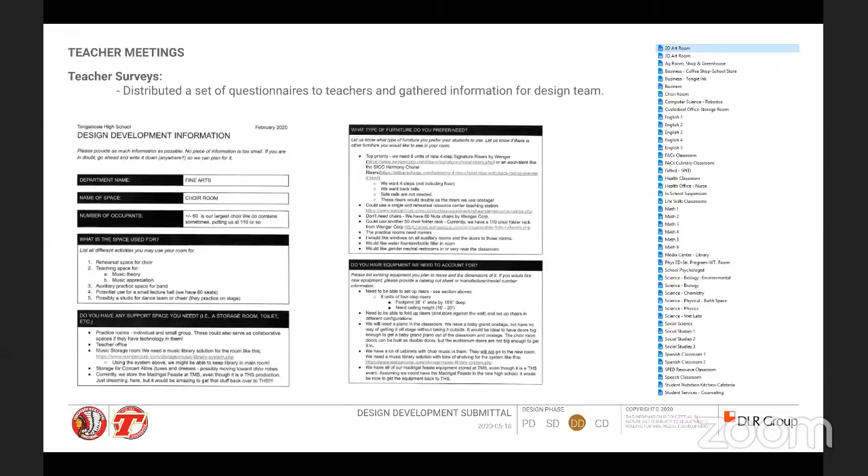Our next step was to actually meet with the teachers in person. So the design team took 2 days in the late part of February, early part of March. We met with staff and teachers at the high school.

And then from there, we discussed the general layout of their rooms, as well as we got into some specific needs for their classrooms. So we took all of that really great information that we got from the questionnaires and the in-person meetings, and we started to put those on our plans.

So we did have to do a second round of meetings with a select group of teachers for some of those spaces that really required a lot of attention, a lot of plumbing and casework modifications like art or science or FACS. And this is when sort of the COVID-19 issues hit, and with all the restrictions.

So we did those meetings via Zoom. Mark Farrar was very instrumental in helping us set all those meetings up with those teachers, so we appreciate that. Really a lot of time and effort was spent on documenting all of this information for the teaching and learning spaces.

So with that, we're going to start with the site plans. Thanks, Robin. This is Josh Earhart, DLR Group. If you recall, a couple of months ago when we were going through the schematic design process...

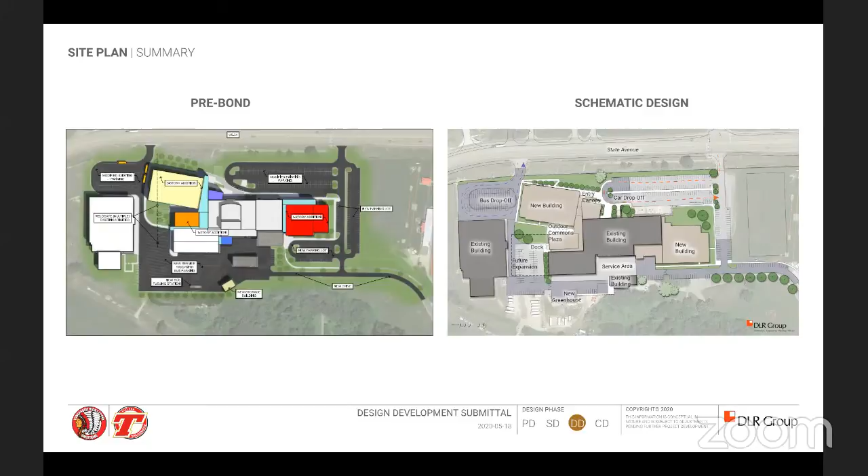So if you recall back in the schematic phase, we were able to separate the two and identify where the car drop off versus the bus drop off was, where staff could park and where students could park. And then we were also tasked while doing all this to hit the existing student parking count and staff count. We were able to do so in schematic design.

And if you go on to the design development, we were tasked to add another layer onto that. So what we did was we added an additional 50 plus stalls to the student parking lot to make sure there's an ample amount of parking over there.

And we developed this, you could say a campus drive, if you will, pulled off to the parking on the east side of the site. The goal of this was to draw the traffic off of State Avenue or Highway 24 and Main Street a little bit quicker.

So we can kind of avoid that backup on State Avenue in particular that a lot of the board was concerned with. KDOT isn't very flexible with moving these curb cuts, so this was our way of trying to improve that site circulation.

So we were able to achieve that, increasing the student parking count to about 1 stall for every 1.7 students. That's good, a lot of times we go for 1 stall for every 2 students, so we're doing better than that mark.

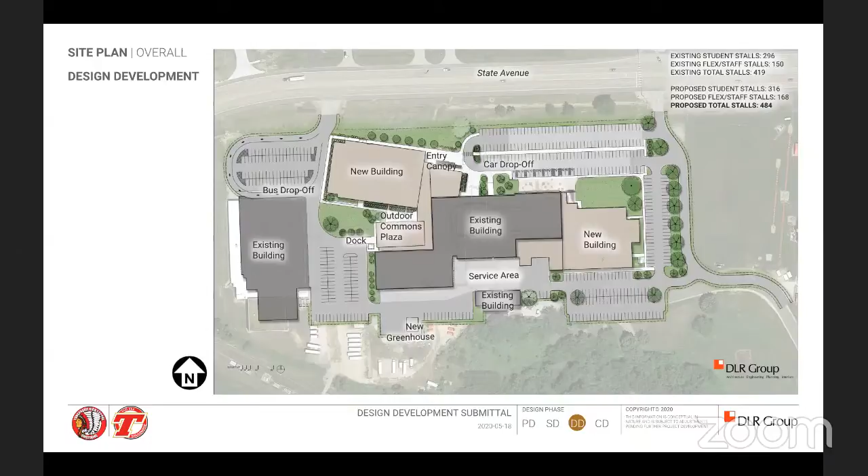If we go to the next slide, we can speak more specifically about some other enhancements. The entry plaza to the north, you'll see a rendering there, but we started identifying some of these seat wall elements, flagpoles, and paved decorative concrete areas, as well as the outdoor commons plaza area. You also see a rendering of that as well.

One of the additions we made since SD is a 3-foot tall loading dock, centered in the rendering right there, next to the dumpster. That means the road or drive there will drop 3 feet in elevation, so when you have a box truck or delivery vehicle, they can unload new goods and supplies at a level and safe area. Everything else is pretty much the same since the last SD.

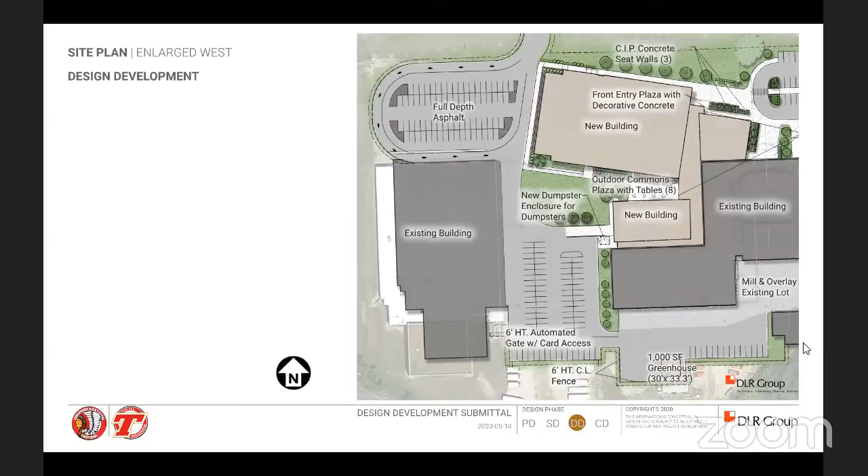If we go to the east side, this is where you'll see the addition of that campus road on the outer side. This allows students to enter the site more freely without having to bottleneck at the entrances there, so it really helps clean up the area.

And again, we started to identify bike parking and the automatic gates to the secured service yard area, and how we are also maintaining the existing memorial space just north of the school.

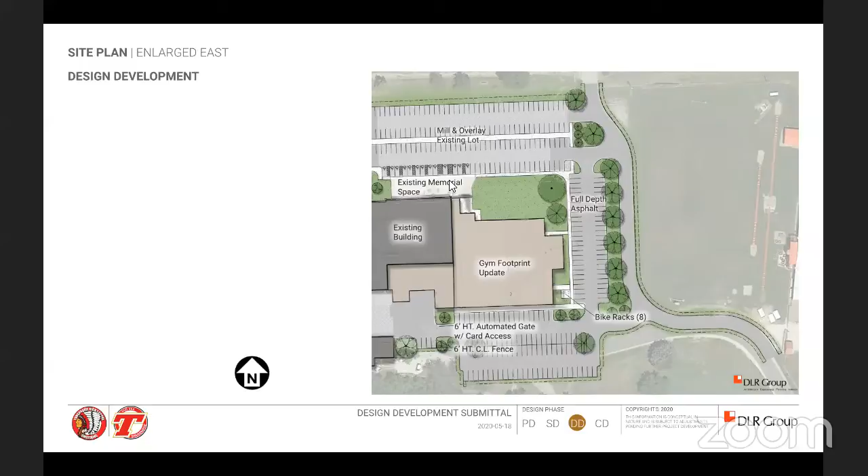With that, we can go on to the next slide and talk a little numbers here. The existing stall count is about 419 stalls. We're up to 484 stalls, and the future capacity of the high school is about 800.

We also took on the task of identifying where we could locate approximately 200 more stalls. We could fit this nicely either on the west side of campus or the east side of campus, depending on how everything plays out in the future. That would bring our parking count to 1 stall for every 1.5 students, which even improves it more.

So we really think we're coming up with a great solution here that's really improving the parking situation as we move into the future. That's all I have for the site. Thank you.

Okay, this is Robin again, and we'll move on and talk about the existing building real quick. So we are going to be demolishing the existing building shown here in red. As you know, here in a couple weeks, the church and the district office will be demolished.

The colored portions of the areas around the TPAC show where we will be doing upgrades to flooring and paint. We will also do some minor modifications to the west stair to meet up with our new addition.

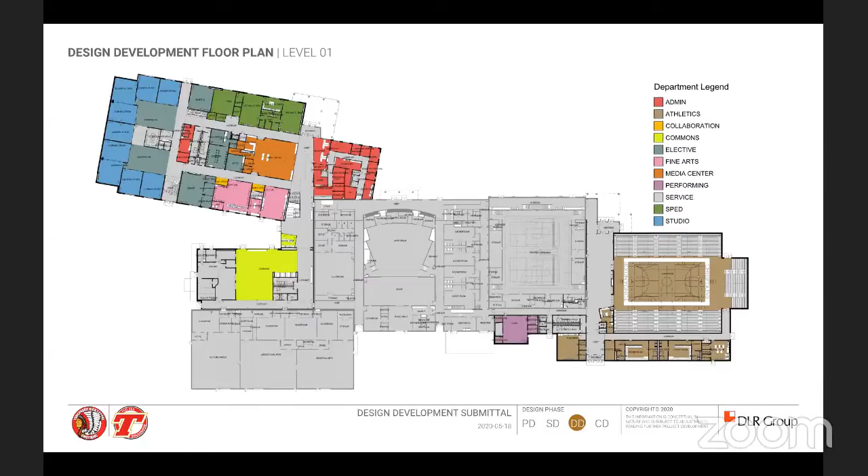I also wanted to point out that we've had some security meetings with Lauren and Mark to talk about how to zone the building in an emergency. We also discussed locations of card readers for access control and security camera placement for the overall building complex when it's complete. I also wanted to mention the HVAC systems will be rooftop package units.

Classrooms will be provided with individual temperature controls, and Trane equipment is the basis of design, but other vendors will be allowed to bid the equipment.

This slide is showing the enlarged plan of the East Gym Addition, which shows the new lobby, the 2,300 seat gym, and the adjoining locker room spaces. This addition also has the new choir room space shown in purple.

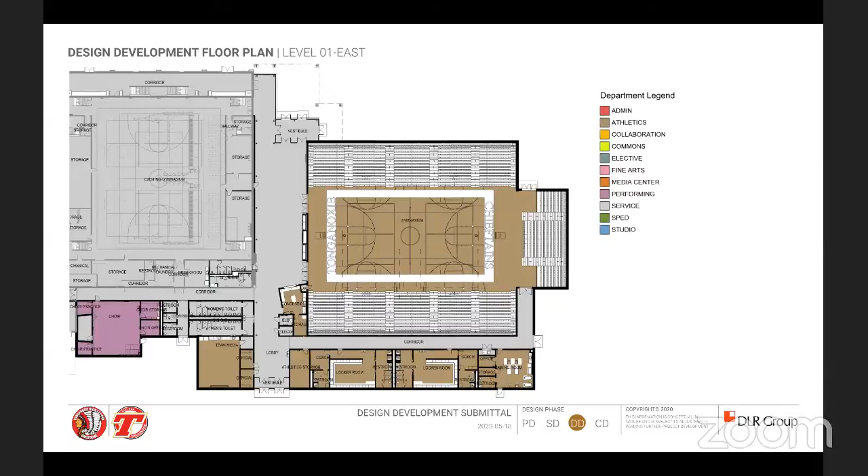And then the axonometric view shows you how the gym bleachers will look. Later in the presentation, we can show you our ideas for the lobby space.

So the next slide shows the West Addition, which is the new main entrance and administration in red. There's a long lobby that connects the two-story academic wing to the new cafeteria and food service area. The cafeteria is designed to seat 200 kids in 4 lunch periods.

In the academic wing, this first level shows a centralized media center in orange, with electives along either side including special education and art. The core classrooms are located at the west end, shown in blue, and they are all connected to an open learning lab space.

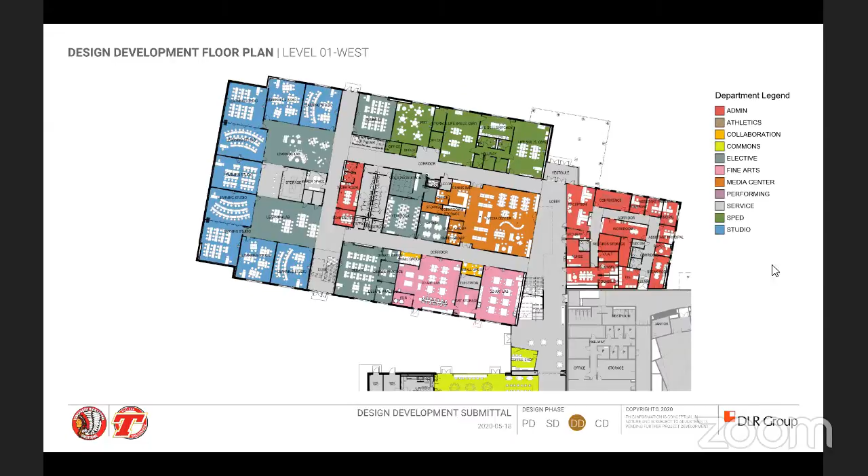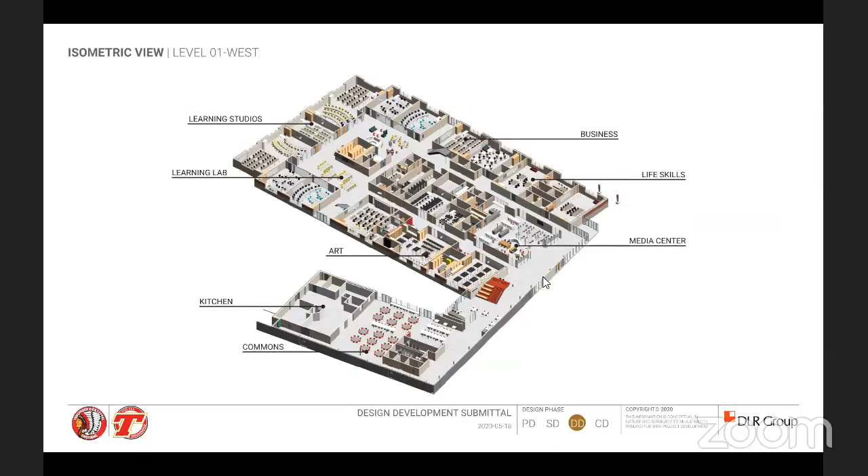So the second floor academic wing matches the first with the core classrooms at the west end, so those stack directly on top of each other. Again we have science electives around the outside and more specialized classrooms in the middle. The media center is a 2-story space.

So when you're on the second level, you can look down into the media center space as well as over into the entry. We are showing a lot of glazing and a lot of transparency, which you can see in the axonometric view. But we intend to use some frosted glass in key locations along the railings and the stairs just to minimize some of those views.

So we're going to move on to West Campus. We've had a lot more development on West Campus during design development. So this space is going to be designated as the new space for the district administration.

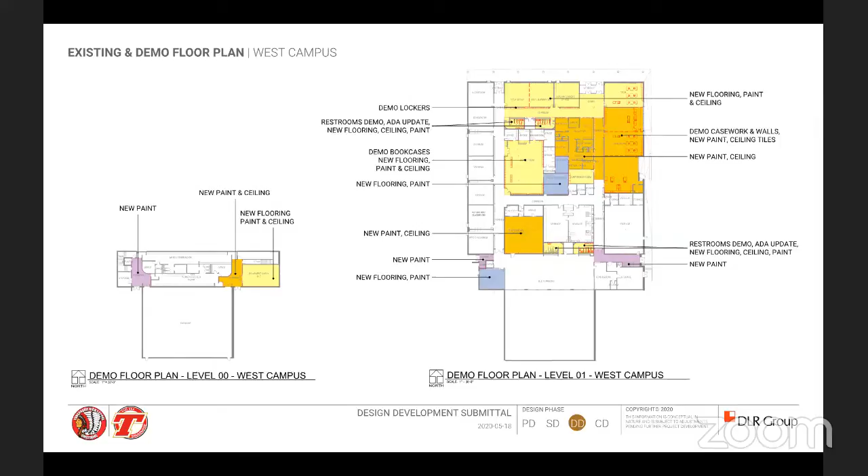There will be some slight demolition work to upgrade the existing toilet rooms to meet ADA. But most of the renovation work is cosmetic, with new flooring, paint, and ceilings, as you can see in some of these highlighted areas.

The next slide shows how the space is designated between the district, which is in blue, and then the city rec department in the olive green color.

So Lauren, Tanya, and Forrest will office out of West Campus, and this is also where your new boardroom will be. There's a large space for staff development meetings and a space for wrestling practice over on the right side. So there will be plenty of space for the district to use for storage, as well as for growth for future learning opportunities.

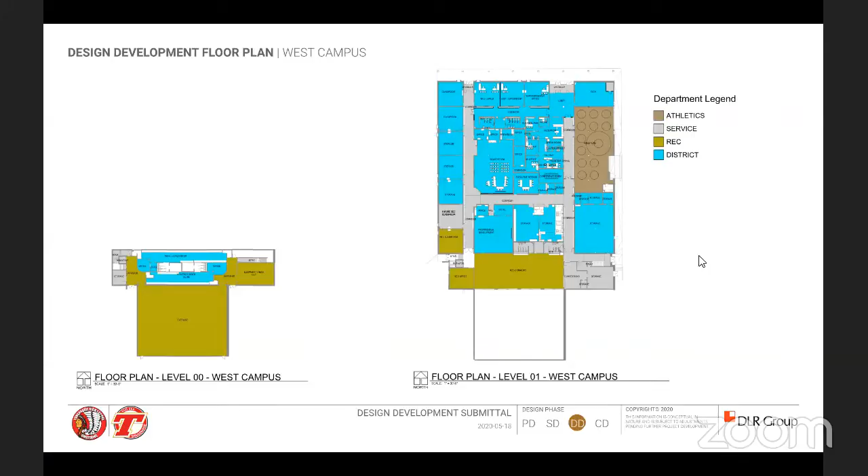And so with that, we're going to move on to the really fun stuff and talk about the exterior and interior rendering.

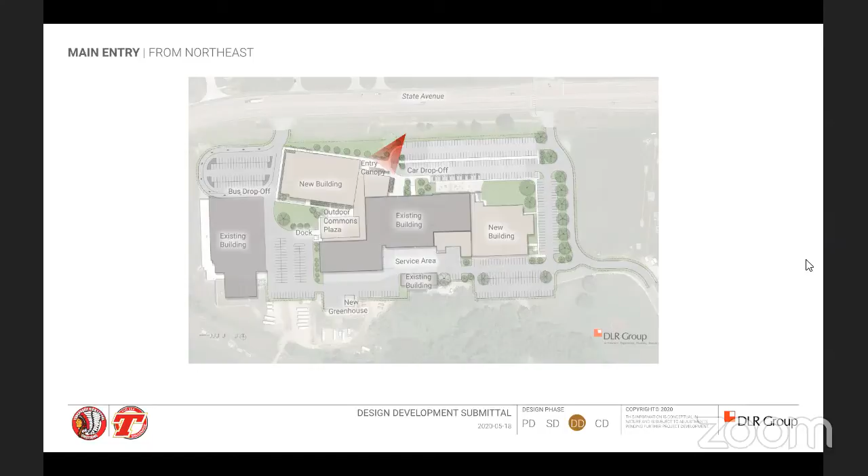Okay, thanks Robin. This is Craig Serig with DLR Group. We've continued to develop the renderings that we reviewed throughout schematic design and even at the Tongie Strong meeting.

You'll see the red cone on the site plan, which indicates the view we're looking at. So this is looking toward the main entrance, where you can see the site elements that Josh was talking about earlier and how those have been developed within the 3D rendering as well.

The same materials haven't changed since our last meeting. We're using the blonde or buff colored brick that matches your existing concrete block, and the red brick will be an exact match to the brick you have now on this end of the building. We've also got some metal panel and interlocking metal panel soffits for the canopy.

And then painted steel columns out front that have a little ornamentation to them and will be up on a plinth to protect them from weather and maintenance. And then storefront and high performance glazing for the balance of the clerestories, the entrances, and the windows into the admin area.

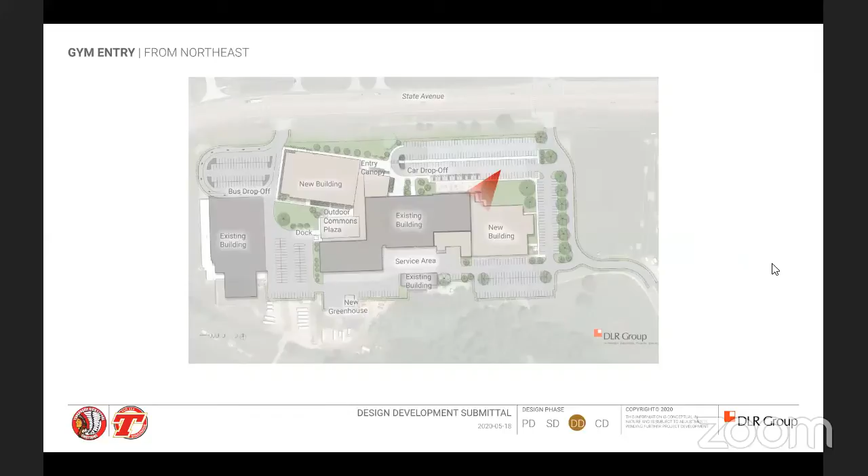And then this cone again shows we're going to be looking at the athletic commons entrance now. So an evening shot here, to give you an idea what it would look like arriving for a game, with the internally lit commons area as the beacon calling you into that space, giving clear identification of the entrance. Again, using the same canopy materials, storefront glazing, and treatment of the columns.

The columns become this organizing element that tie all three entrances together, from the admin down to performing arts, and then the athletic commons entrance as well. The gymnasium over on the left-hand side is your red brick, with a little bit darker metal panel for the upper portion of that facade, wrapping around the entire gymnasium.

Okay, and then the last view would be of the outdoor commons plaza area.

So this is looking from the west, in between the cafeteria commons on the right-hand side and the education wing on the left-hand side. The larger glazed opening is the two-story stair that connects the first level and second level.

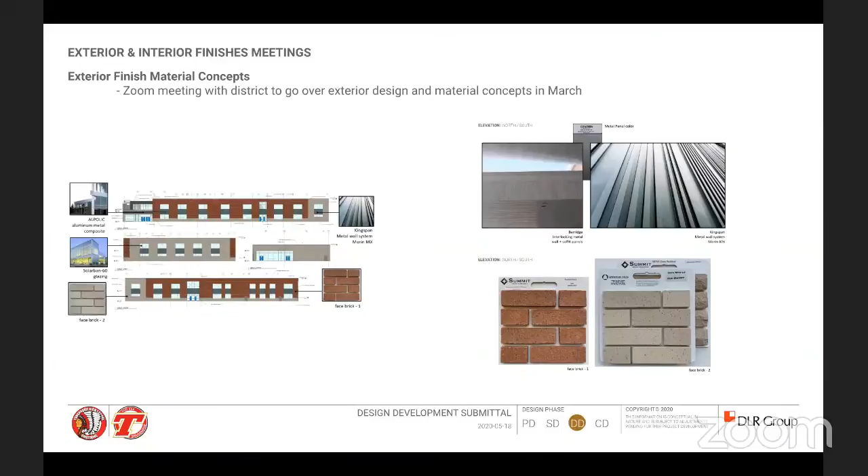Just to call out, we've got entrance doors from both the art rooms that go out into the enclosed courtyard, doors from the main commons right beside the Tongi store, and then doors that will come out from the cafeteria itself.

Okay, and again, these are the materials that are called out on the elevations, and we've talked about those. So I think we're ready for our interiors renderings.

Tammy, you're on. Tammy there? You're on mute. Okay, this is Tammy with the DLR Group. Sorry, I was muted in two different places.

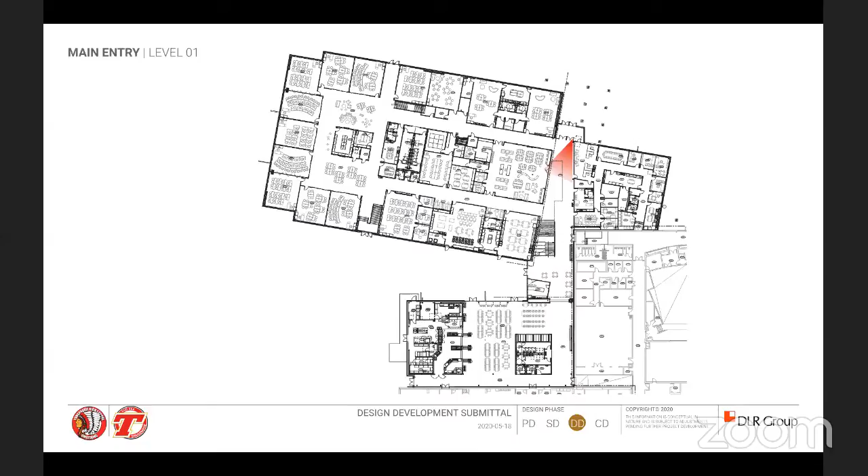We're going to jump right in and start looking at the main entry lobby. To the left, we have the admin, and to the right is the media center. Straight in the back is the seating steps, and straight forward you're going into the student commons. The entry lobby is more neutral finishes with splashes of red.

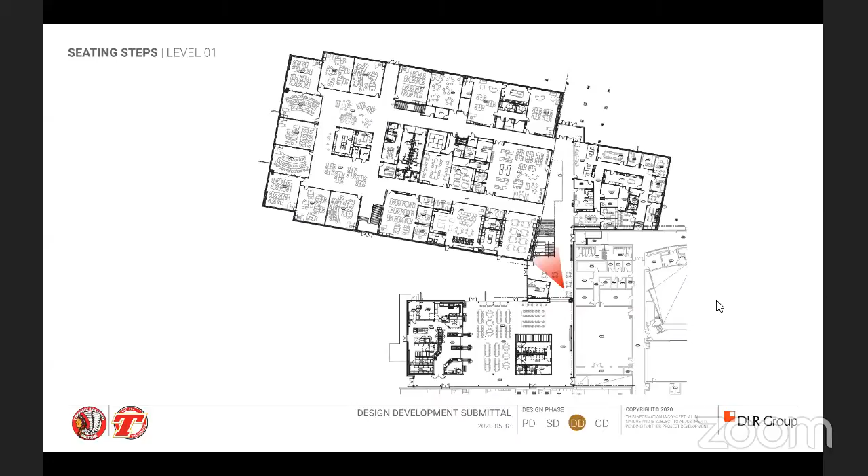Next, the next view we'll be looking at is the seating stairs.

Here we have red rubber tile and rubber tile treads with wood seat caps. The glass rail, as Robin mentioned earlier, is a lightly frosted glass. And as you can see with the room above that overlooks this, that frosted glass at the bottom panel is of the student research studio above. We've added Tonganoxie spirit elements throughout, with the T logo on the stairs.

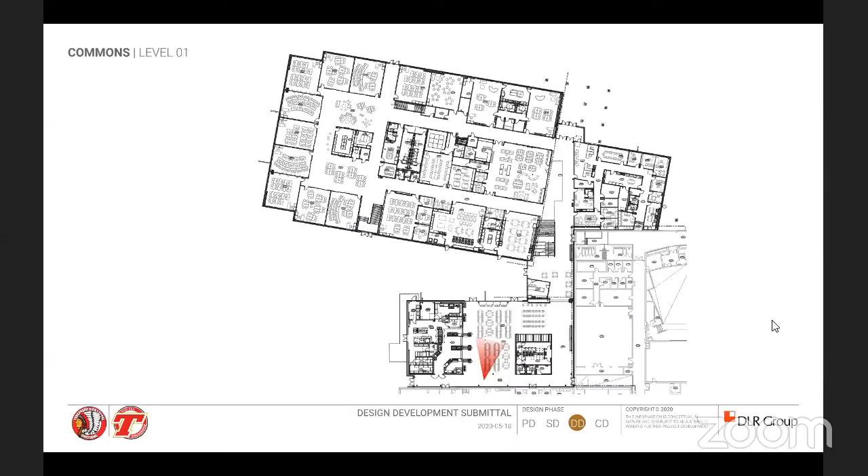Next, we're looking at a view of the commons. This shows the servery on the right. The courtyard is straight ahead. And on the right, we have a graphic word wall covering that we will personalize to Tonganoxie's keywords, phrases, and school spirit. This just gives you an idea of words that could be used.

Next, we have one of the learning labs. This view faces the center core of the learning lab. In this view, we show multiple areas to collaborate. To the left, we look into the makerspace lab, and to the right, there is a dry erase wall covering that wraps around the core. We also use acoustical colored baffles to define this area on each of the floors.

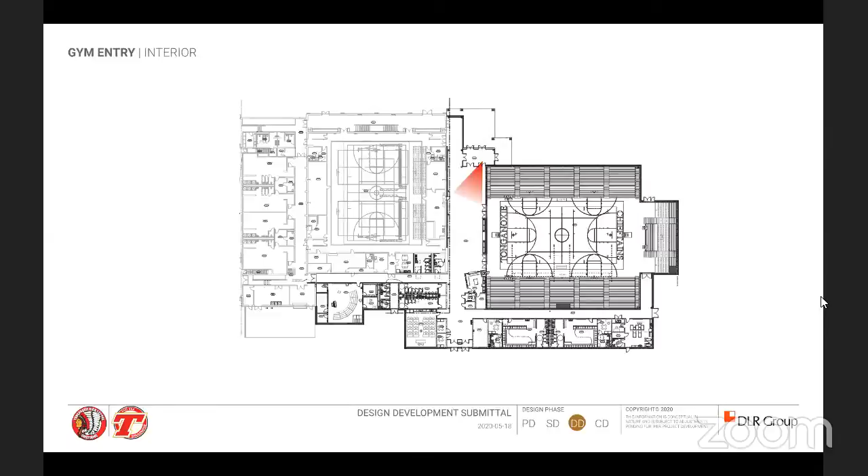Now we're going to look into the athletic lobby. Here to the left, we have the entrance to the gym and some display cases. Straight ahead is the concessions, wrapped in red panels. And to the right, we have a tone-on-tone painted wall graphic that says Tonganoxie Chieftains. We show tall tables and chairs, or seating for concessions or events.

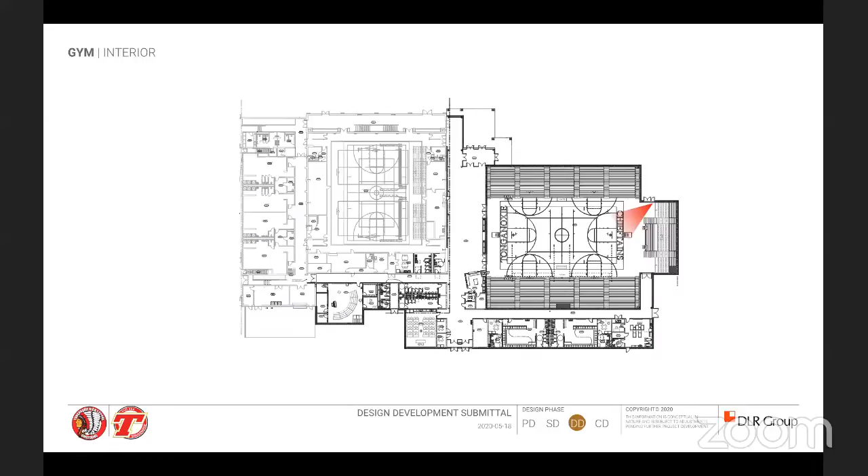Next, we'll show a view inside the gym. Here we have white walls with bands of red Tectum acoustical wall panels and painted red stripes. We've shown the Tonganoxie spirit painted on the walls with the Chieftains and the T logo. The ceiling will be a medium gray.

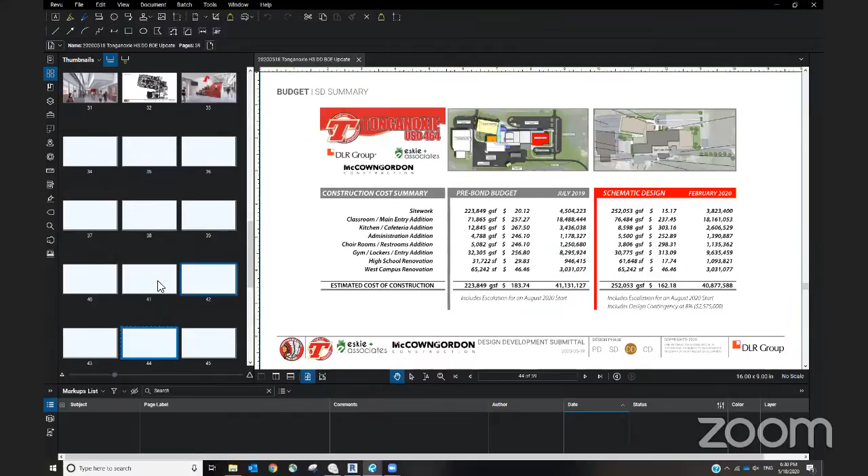And then this finish page, these represent some of the finishes used throughout. We have the main entry lobby shown, and on the left side, we show some media center finishes and the coffee shop and student store proposed finishes. So just some examples.

All right, so we're going to go into the budget. We can't hear you, unmute your screen. Can you hear me now? Yep. All right, sorry about that, just had the same problems Tammy did.

Yeah, I'm going to take a minute to talk about budget. I really wish I could have seen everybody's faces react to those images, though. Those are coming along really well.

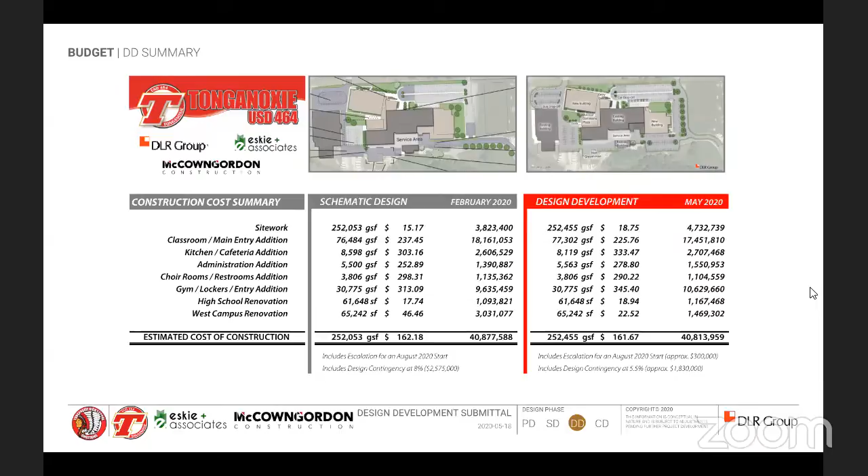There has been some movement in some of the numbers realigning with our scope, so we'll go through some of that here in just a minute. But as Aaron mentioned at the beginning of the meeting, we are overall on budget, so that's good.

What I've done here is on the left, there's the schematic design layout for the site, and on the right is where we are today. Right below it, there are some cost variances, whether cost increases or decreases, and how they impacted the budget overall. I don't plan to go through those line by line today. You should have a copy of that. If you have specific questions, we can address those as we get through the presentation and backtrack to this.

The biggest change is we're just getting caught up now with the additional parking to the southeast, and the drive realignment along the east of the building. That's really where most of our cost is coming into play. We had some other things that get adjusted along the way up and down, but those are the major cost drivers. In the end, we're up about $870,000 on the site.

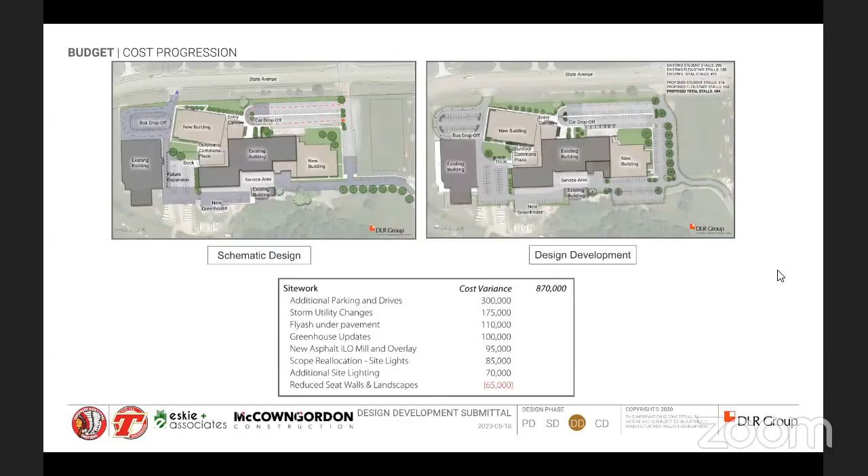We'll go through how we made that up in some of the other areas. So on the next slide, this is the academic addition, which includes administration and the cafeteria. Again, schematic design is on the left, design development on the right. Obviously a lot more has gone into the development of the design, and we have a lot more information.

But the biggest thing that's really contributed to our savings, as you can see, we're about $432,000 down on the administration wing, which is good. That came with coordination with HVAC controls. We had some meetings with your group to make sure we aligned that with the needs of the facility. With electric, this honestly is coordination between your IT staff on what Forrest is going to be doing versus what our construction team will be doing. So those are the two biggest savings there, in HVAC and electric.

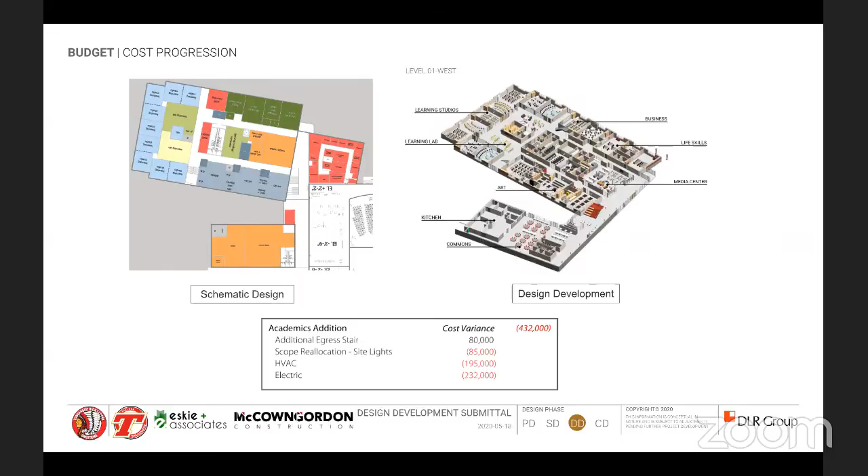So on the next slide, this is the Fitness and Wellness Center addition. Of course it does include the choir, but probably the biggest contributors to our scope changes have to do with the skin, as the first one on here. I included an image down there on the lower right. At the SD level, we made some decisions to look at options on the skin to reduce the amount of metal panel on the back side, the south side of the building.

At the DD level, we wanted to run through that and make sure if the budget could handle it that we could include it, but we're studying options right now. If there are opportunities on the south side, again with limited view from drive lanes, we can look at some alternative materials to save some money there.

HVAC, there's some coordination there. As I mentioned, on the academic side it came down. On this side it actually came up once the design team was able to get through sizing the equipment for the space.

There's some other changes in the choir addition. There's a corridor that now runs through and connects the existing campus together, whereas before it was closed off, creating an awkward loop. So that was opened up. Some additional square footage was impacted in the choir rooms itself, and then there are some additional restrooms there in this end of the renovation.

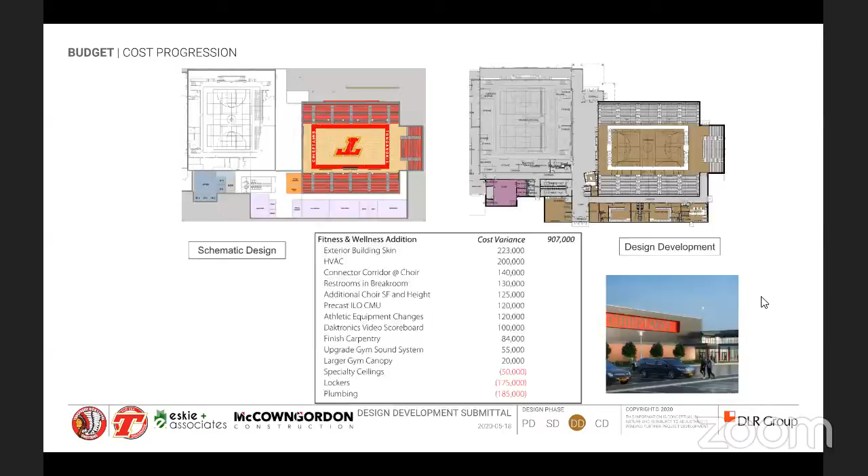The high school renovations themselves, we've seen probably the most design input in this round as far as the high school renovations, so we're getting caught up with that. Really, we're on budget with everything. There's a couple scope adds that we want to talk about.

One of them is the polished concrete that you're aware of that got added into the early site package. So that corridor just north of the existing gym, we're going to perform that work this summer. So we did have some money set aside there, but it was not a full floor replacement and polish. So that's only worth $14,000. It's not a big driver in cost.

Then the next one is the Performing Arts Center canopy. So right outside the auditorium, there's a canopy there. The design team is working to make sure that has a cohesive design, when you're talking about the athletic center entry canopy and the new academic entry canopy. So the design team can address that as well, but we do think it really is good to have a cohesive canopy where it otherwise would kind of stand out there. So there's some increased cost there that we picked up.

Overall, we're not up much on the high school renovation. Probably the biggest swing in cost is actually in the West Campus. I think most of us knew this was coming, as we were not planning to spend as much in the Parks and Rec area.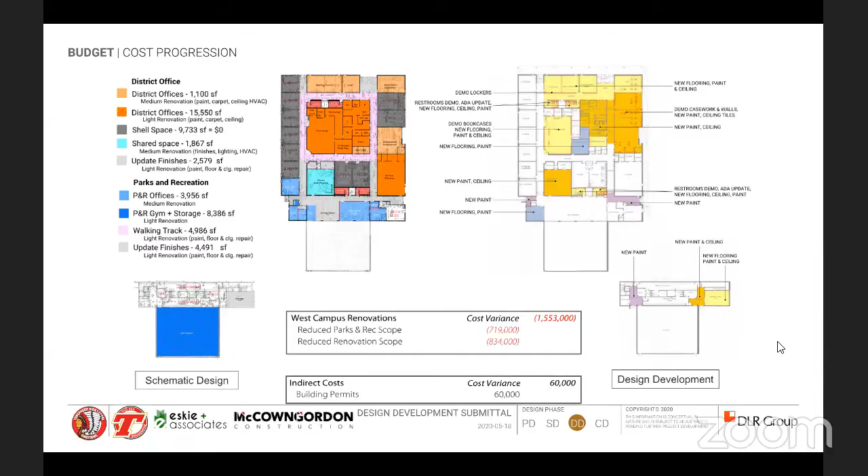So high level, that's where we are right now, and it does balance itself out. To the most part, any savings is getting shifted into the design contingency to make sure we're maximizing your bond dollars. And Aaron will go through the master budget and if there's any other items we want to earmark for some of that savings.

All right, thanks, Joel. So yeah, as Joel said, as we talked about during the schematic design, the overall master budget of the $51.4 million bond project, at schematic design there was about $10,522,000 that was in the estimated soft costs. That's increased a little bit just due to the slight decrease from the construction cost side of the ledger to get us to that even 51.4.

So you'll see in the breakdown, most things are staying pretty much the same. We've got the architectural fees that are based off of the construction value from the DD budget, and miscellaneous soft costs that have to do with some already expended funds for geotechnical inspections and surveys.

So the FF&E and miscellaneous furnishings, those adjusted a little bit, but overall are close to the same. It was adding a few things in that we found out during the design development process, and just kind of separating out two separate funds between actual classroom furniture and additional equipment that goes into those classrooms, just to be able to account for it a little bit better.

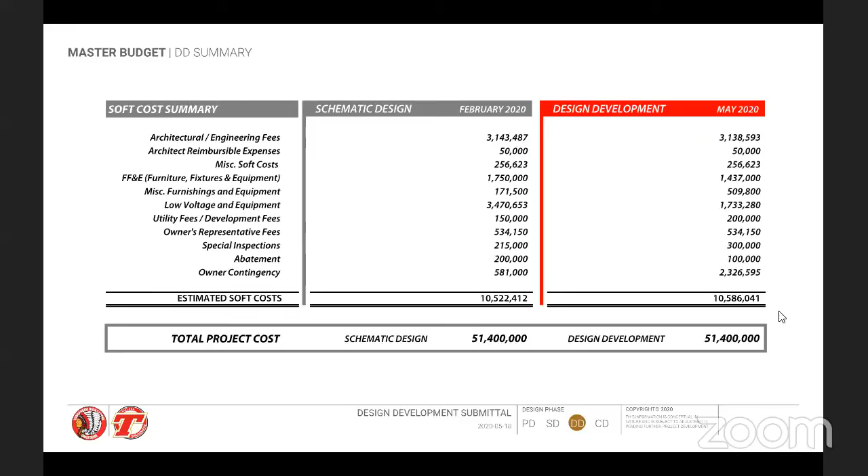So to just show you a few of those things, a few of those cost options, this is the sheet from McCown Gordon's design development deliverable, and is what they have been working on. You'll see that the numbers aren't quite in order. There have been some options that have been looked at and eliminated from this as we've gone through the different phases. These are ones that are still maybes or yeses.

We wanted to share this to show you how that is being tracked. We'll talk about a couple of them specifically. You'll go to the next slide.

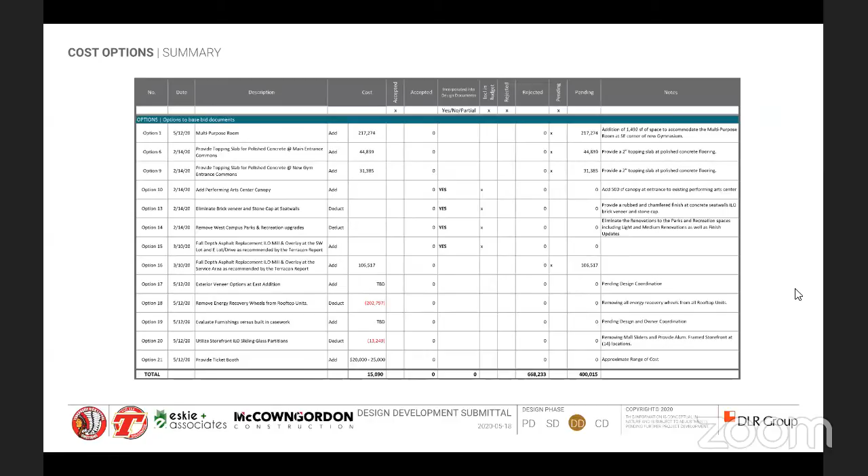So one of the larger cost options in terms of dollars is this multi-purpose room. So it's an additional 1,400 square feet. On the left side of your screen is the floor plan that is included in the design development budget that was just presented. On the right hand is the alternate for the multi-purpose room. So you can see that long rectangular area with the extension of the corridor.

So that has been something the district has requested for additional use during games, for halftime meetings, for additional storage of the floor-mounted basketball goals, and several other uses for that area. So the budget there, I think it was $217,000 for that room. So that is on that list that we have been discussing, evaluating to add into the project as we realize some savings in other areas.

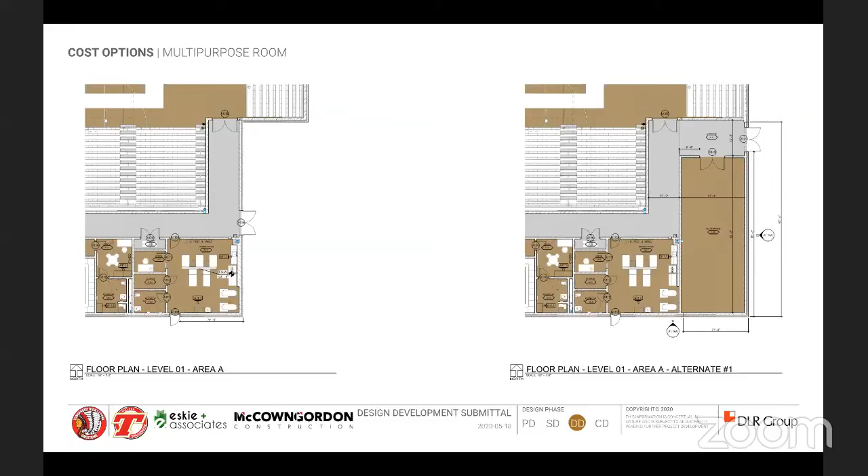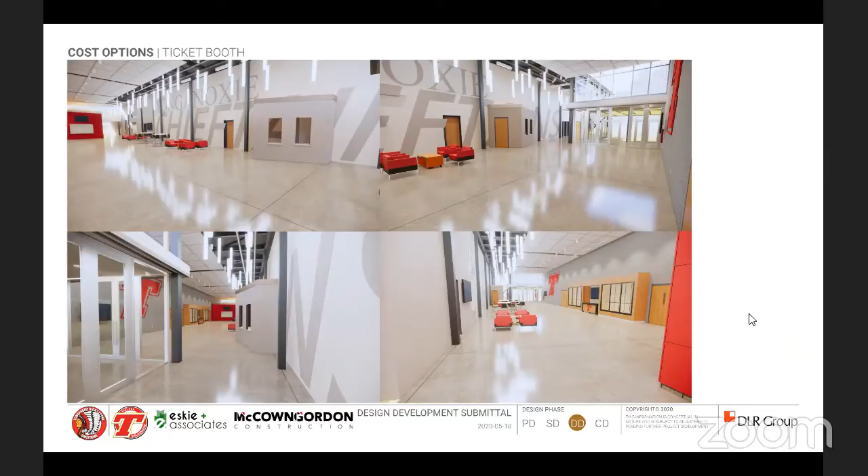And the last one, I know has been a back and forth conversation for a while, and wanted to share this. We kind of put this together just before we finished design development, so bear with us on the actual level of design here. This shows a ticket booth, a built-in ticket booth at the north entry into the commons for the gymnasium. It has two ticket windows there, an access door, which you can see in the upper right-hand image. The idea would be that all traffic coming in would funnel right towards that ticket booth location. So DLR is working through developing the design of that, so it's not just a gray box — that is what is being looked at for the ticket booth option.

Hello, everybody. This is Darren Lee with McCown Gordon. The last time we met, we had a site logistics video that we played for the Tonganoxie Strong board meeting. So instead of playing the same video again, we provided a rolled up summary schedule. A more detailed schedule has been provided out there, but for purposes tonight, this is basically just a summary schedule. I wanted to go through at a high level and give you the overall time frame of each phase, just as a reminder.

Phase 1, this summer 2020, is the site utilities and the demo package. That GMP was approved last Monday — we appreciate that, thank you. The teams out there right now, or at least making preparations for mobilization this week. Over the next 5 to 10 days you'll start seeing a lot of things happening out there. That will go through basically the first part of August, and we'll be ready for kids to come back the first day that the school has activities.

Phase 2 is the learning center, the academic wing, and the kitchen and cafeteria. Right now, with documents coming out in August, we will bid that in September for the September board meeting, with the start of early October. That runs through the end of 2021. Within that time frame, we'll also complete the site work that will be within the fences on the west side. If you remember the site logistics plan, we will complete all the paving, the curb, gutter, and landscaping. So when we turn that building over, it'll all be complete with all the site work.

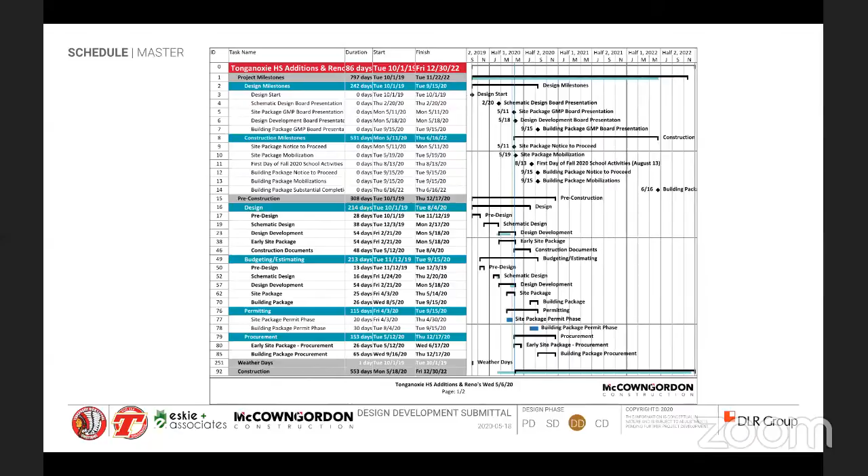Phase 3 then will start January of 2022. That's the athletic wing and the choir room. Again, we'll do the site work within our compound. When we turn that over, it'll start in January — right now we're looking at the latter part of fall. We're going to do everything we can to speed that end date up, but right now, based on what we know, with some asbestos abatement to do in there and a little bit of structural bracing to do before we can even get started doing demo, we're looking at the latter part of the fall of 2022.

When the renovation of the academic wing is complete, the West Campus will move into that new academic wing. That frees up space for us to start renovating at the same time, January of 2022. That'll take about 4 months to renovate. By May, the administration ought to be able to start considering moving back into that building. Summer of 2022, we'll do any final renovations to the existing building and any last bit of site work within our compounds that we didn't get to during construction.

The only other comment I have is on the schedule. One of the comments the board has made has been tying schedule dates of school activities and district calendar into our schedule. Right now it's based on what we know of the district calendar, and as the calendar gets populated going into the school year, we'll learn when the athletic events and fine arts events are. We'll spend a lot of time with Mark understanding what that entails and what we need to do on site to make sure we don't interfere with those operations. That's really all I have for the schedule.

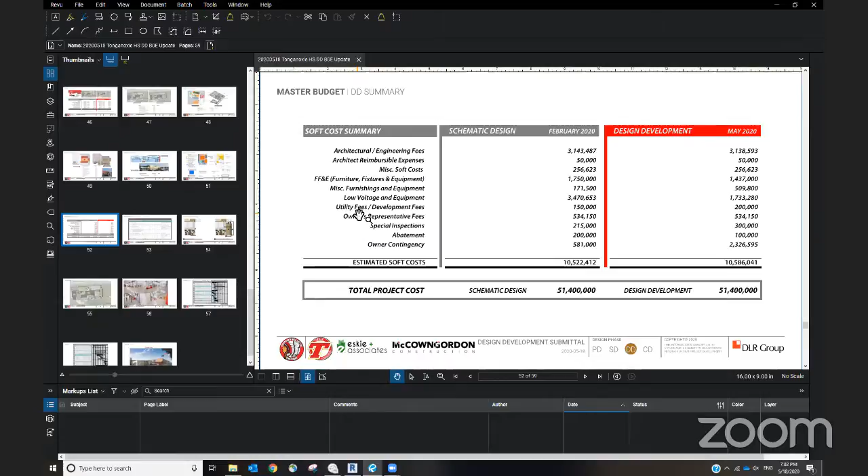So Joel, on that, based upon what you just said, it almost looks like that choir is over $500,000. Is that accurate?

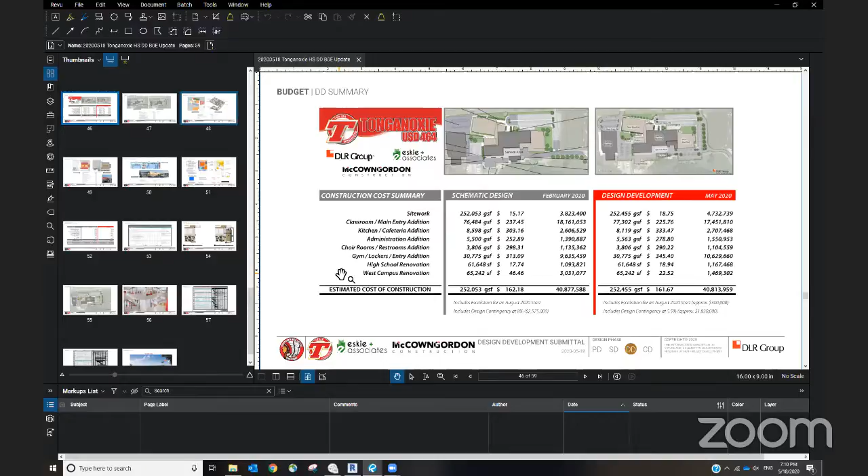So on the gym layout, if you want to go to that enlarged view for the gym layout. Yeah.

So just a general comment. Right now, I'm just not getting the sense that it's as integrated as the academic wing that we have shown. I'm a little concerned with the space utilization, especially on that end side of the gym, and how far back that sets from the court.

We did such, I know the team did such an amazing job at pulling in all of the different teachers and a huge number of people during the programming phase of the academic wing, and I don't know if that process happened here with that number of folks, because as I look at this, it almost looks like it was a gym, and then there was a decision to add some additional seats, and that went on to the side, and then things went down to the bottom, and then the concession went on to the end back on the southwest corner. And I'm just worried that the flow and the space utilization isn't as optimal as the academic wing.

So essentially it's been left as an open, flexible space. We haven't really gotten into the detail of outlet locations yet, but we're still working on furniture development for that space. I think flexibility, being able to set that up in a number of different ways, is going to be important.

The toilet rooms, the men's and women's, are those sized to support activities going on at the same time in both gyms? Yes.

Robin, remind me, but I think there's a certain calculation for not necessarily both gyms being 100% full at the same time. Okay, well what is the number, do we know what that is? Yeah, it's on our plumbing fixture count on the code sheet, and I'm sorry, I do not know that off the top of my head.

So we have met the plumbing fixture count for the IBC, the Uniform or the International Building Code. Okay, for both gyms being occupied and having activities going, is that correct? It's just for the main gym, the big gym. Okay, so where are the restrooms for the existing gym?

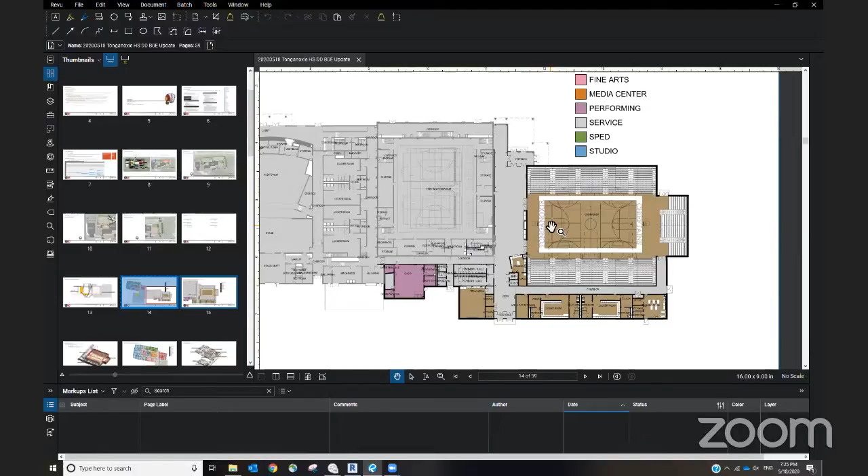Because I think that's like building your church for Easter Sunday. That would be a lot of cost that would be hard to justify to the community. But however, the plumbing fixtures are there. So will someone have to walk down to these other restrooms that are right outside the auditorium? Maybe if they wait a minute and a half, but probably not. So we're trying to go down the middle, be practical about it, but still meet the code.

Yep, and hopefully your community won't have to wait in long lines to use the restroom. I understand, and I asked that question because in a scenario where we have something going on in both gyms, we were talking about the ability to segregate the buildings for security reasons between the art side and the athletics and academics. So if restrooms need to be shared between them, that changes the security and door locations and that strategy. Because right now, if you wanted to use those restrooms over in the auditorium, you would have to open those doors and let people back into that other area. And that is counter to some of the original discussions we had. You follow where I'm going? Yes.

Robin? Yep, absolutely. And something that as we get further down, we'll make sure - I think Aaron and Robin just had an access meeting, kind of confirmed where the zones are. So we'll revisit this again as we start CDs and make sure we've got it all accessible the way we need to.

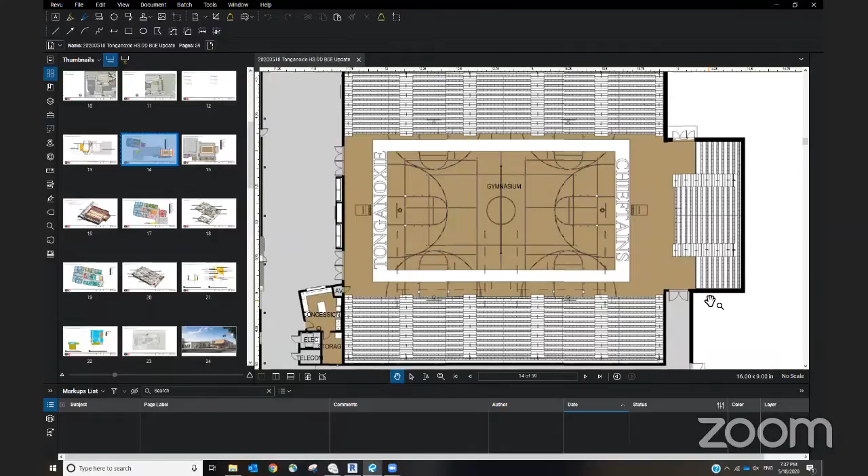Yeah, that is correct. That space was designed for the student section. So the prime seats are to the north and the south, and this area is for graduation overflow space and the band. Do we have dimensions on that? I pulled some dimensions off. It's to the outside of the baseline, it's 18 feet to the stairs. So from the actual court to the end of the stairs, it'll be 24 feet.

It's going to look like a lot. I mean, we have a spacious amount on the sides, considering, for traffic and stuff. You're going to be feeling like you're sitting way back in the hole.

This is Kaya. I already wrote a long email about how I dislike that area of the gym, so I won't bore everybody with my comments since I already shared them with people, but I wanted to say that I have 2 kids that are in high school. One is a big Red Club leader, ambassador, whatever, I don't know the correct terminology, but neither of my children would be excited to sit in that area because they're both sports lovers and very competitive people, and they don't want to sit in a viewpoint where they can't see the game.

I also worry about having the pep band and the students right there in that section, because anybody with sensory issues - the pep band's awesome, but they're very loud. And my daughter, who is part of the Big Red Club leadership, said they work very hard on creating theme nights, and the goal is not only to energize the students, but also to energize the crowd in general. So I just think sitting 24 feet back from the court line is doing a disservice to the student body.

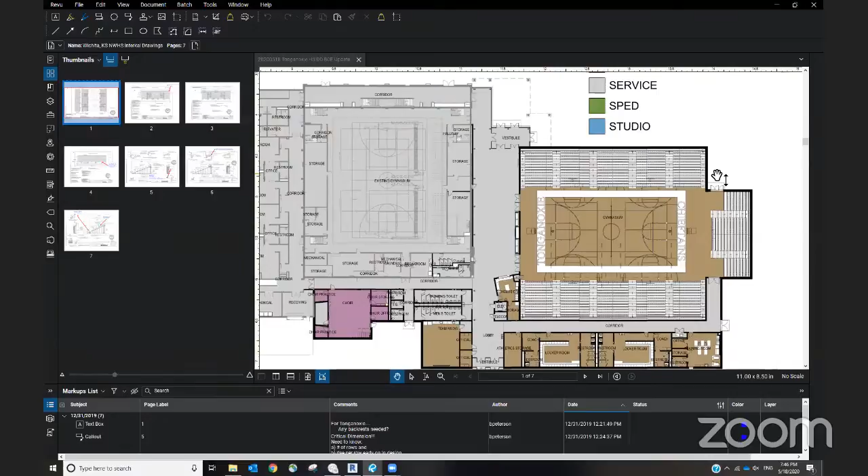I got a question. Go ahead, Chris. How is the square footage of this new gym in relationship with the gym at the West Campus? No, the West Campus gym, what is the square footage of it compared to this new gym we're building?

This one has to be much larger, Chris. I mean, I don't even know if that one over there is a regulation size. Yeah, this one's much bigger, and we added in the seating and all that. There's only one set of half bleachers over there. DLR, do you guys have that square footage anywhere? I do not. Ian's pulling it up. We may have to get back to you on that.

Is there another question, or what's the thought there, Chris? Well, I'm just trying to understand, is gym space a problem for us now?

Yes, it is. I know that for a fact because Phil Jones has said that several times, and so have the volleyball coaches, that when they're trying to run practices, they don't have enough space. I talked to Phil today trying to understand this gym and how they'd utilize it. He said if they pushed back the bleachers in the area where the band will sit, he could send kids over there to shoot baskets. If you have one team going cross court closest to the entry door, another team like varsity there, and JV in the next gym, players needing to work on shooting could go to the bleacher area and put up 100 shots or whatever. But I also know during camps they run into space problems.

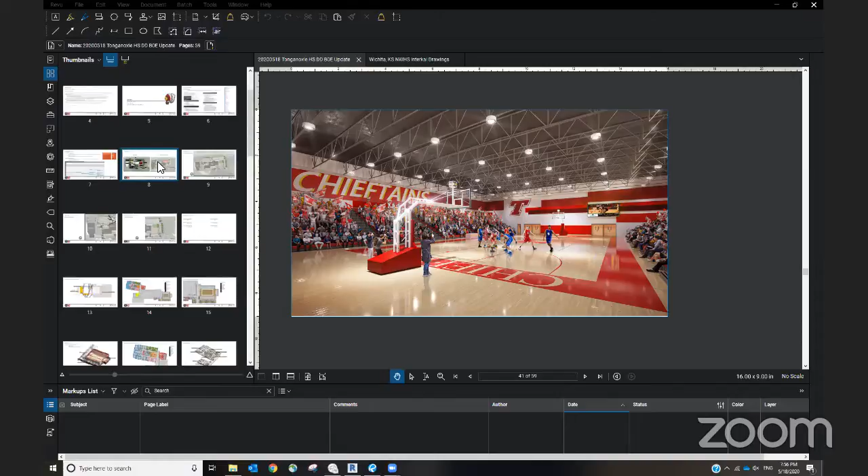So on the site, I have a couple things. The greenhouse was listed with a variance of $100,000 for upgrades. I'd seen the greenhouse on the previous drawing, so I was curious what the scope was that would account for $100,000 in a greenhouse upgrade. So Drew, we're still working through that. We're meeting with a vendor this week and the teacher to further develop that scope, but we're trying to be cognizant of the funds. So that's still being designed. Okay, so that's still fluid. Yes.

Okay, the bike rack location, I think we probably ought to look at that location. Not a big thing. And then I had a question on the landscaping - at what point is the landscaping defined with regards to irrigation and vegetation, and thinking about maintenance around the buildings and around equipment and that kind of stuff? When is that covered?

Yeah, so Drew, we have the species selected at the moment. They're all very common local species that are drought tolerant, I should say. As far as irrigation scope, pretty much the front entryway, the landscape beds around the entry canopy and the front door, if you will, that is identified as to be irrigated. Okay, has Mitch and others been involved with that, just for trimming and mowing considerations?

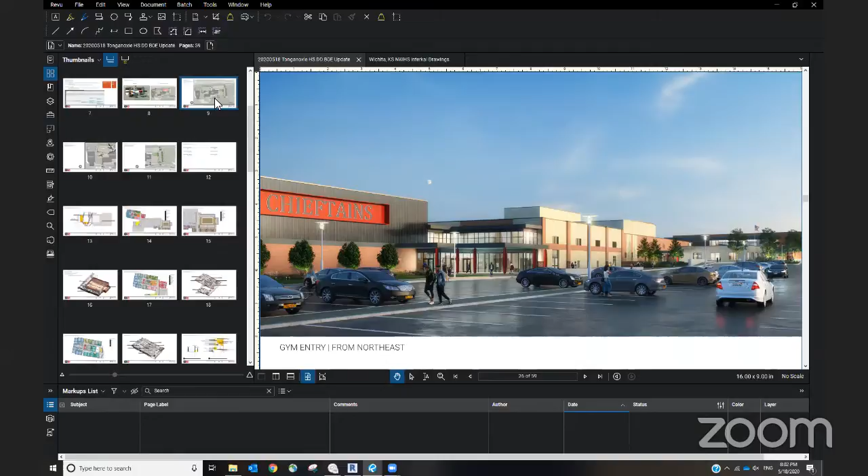Does that answer your question, Kai? Yeah, so there's no other, I'm just trying to visualize it. Like, I guess the west side of the west campus doesn't really have windows along it, really. I'm just trying to figure out how many feet along that is, and if it's just going to look... I don't know, I'm worried about it. The south or the east, I mean, it will be just all gymnasium. I think there was an effort to not put windows in due to the impact natural light has on the gym and players during different sporting events.

I think the question is can we just get some elevations of those areas as part of just future things, so there isn't much to look at, just so that we have an opportunity to see it. Because I agree with Kaya, I don't think I've seen those elevations really, at least since February or maybe before. Do you have the presentation that was done to the city planning and zoning that we could pull up, or?

So we do have elevations that are colored, and we can send those over. We just have to find them. Kai, is that okay with you?

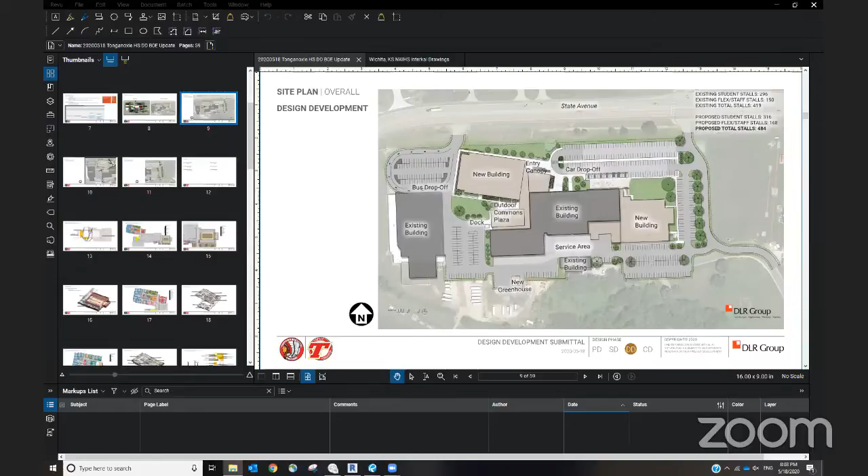Yeah, that's fine with me. And this is Erin, I was just going to add that, you know, the site plan that's pulled up right now, you can see there's a row of trees separating the drive from the parking lot. So in terms of from the football field or Main Street or even up on State Avenue, you would have some breakup with the vegetation, I think, as well.

You have another question? Oh, me? Yeah, I was just wondering, I just want to clarify. So when we vote at the end of this, we're voting on you moving forward to the new phase, and there was a page in the presentation on the finishes, and I think that those are not set in stone and that those can change later. So I just want to make sure that that was just for giving us an idea of what possibilities and the general feel is, and that's not exactly what it's going to be.

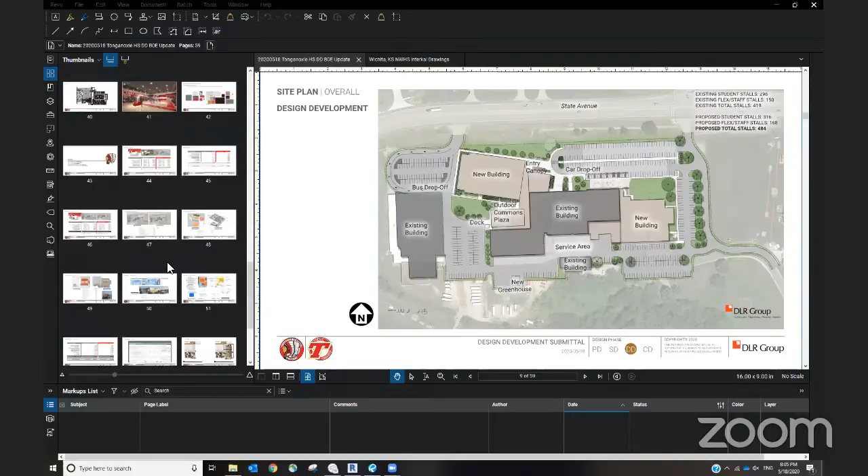So Kaya, there were a couple things in there, and Tammy, you can jump in if you want, but a couple of those finishes were fabric ideas for furniture, which have not been selected, or really, that hasn't really become part of the conversation too much yet. So those are kind of ideas that fit with the color palette, and that will be further developed. I think in the general sense of sticking with the reds and the grays and the whites, that is the direction that they're taking the interior design as a whole.

Erin, what's the time frame for making these selections? We have not set a date for a follow-up finish meeting. The next step would be physical samples with specific color selections, and that will be coming pretty soon. The fabrics and finishes on furniture will follow along a little bit later, and will be kind of a separate process from the actual interior design.

But in terms of color palette and general interior finish, it's really, I think we would be looking for some level of consensus that this is the right direction. Like I said, we've had two meetings with focus group in the district to get their feedback on this color palette and general direction. So we've kind of been moving forward based on that input.

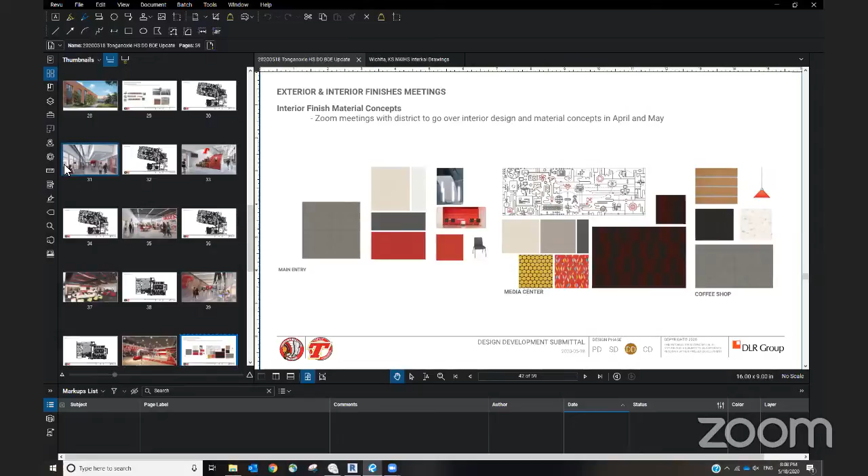Hey, Kaya, you're kind of beating around the bush. Which of these do you not love? Drew, they already know, I already sent emails. Oh, okay, so yeah.

Does anybody else have any questions? Because I can move on to—let's give some people a chance. I mean, Karen, Stephanie, Chris, you haven't had a chance to jump in yet. So far, most of the questions I've had have already been answered. Okay, Karen. Are you there, Karen? I'm here, Jim. I'm good, I'm good. All right, just checking. I know Chris chimed in with a couple, so he'll jump in if he needs to.

Go ahead, Drew. I only have 4 more questions. So, one, the West Campus. If you want to go back to the West Campus. There's the one that's color-coded for the different uses. That's probably a better one. There we go. So my question is security and access between the different spaces.

What is the intention for separation between district space and the rec center space? I can take that one. I don't know if you can zoom in at all, June.

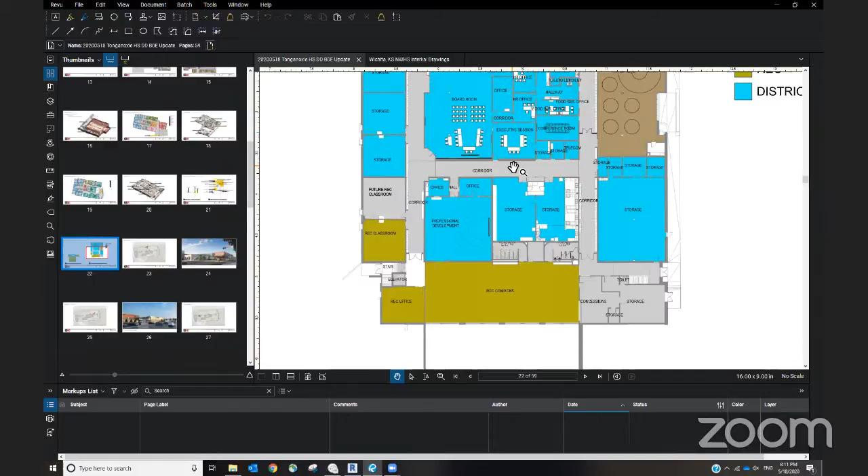And then what about the other side, the other corridor that runs to the north? So you would have access all the way out north through that corridor out to the north parking lot. Okay, but you couldn't get into the rec space, or you couldn't get into the administration space to the right.

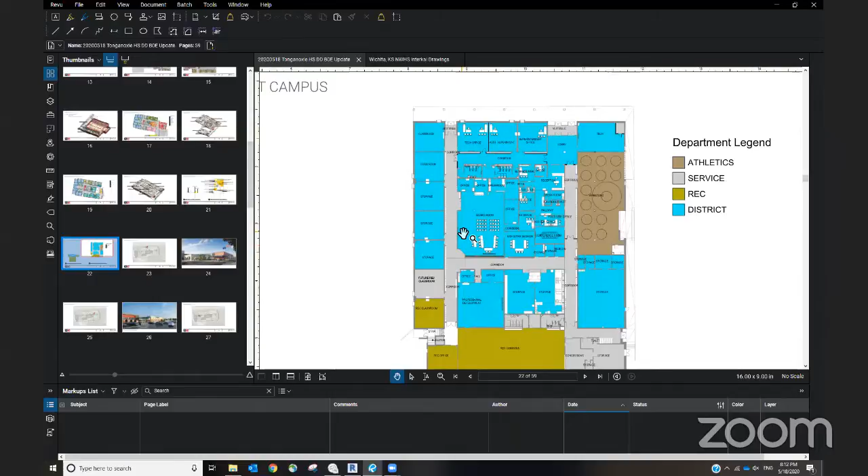So part of the conversation with the rec was access and parking in that north parking lot. Could you walk through the boardroom, into the corridor, through the HR office, and cut right across into the area? That door that goes from the boardroom into the corridor and HR office will be locked - you will not be able to go through there.

Will all the other blue doors also be locked and keyed? Yes. Okay, I'm just a little worried about access into the building from the rec, and the potential for vandalism and that kind of stuff even if the doors are locked - the hallway, and how that'll work. So my comment is right now it looks like the security line is more of the doors into the rooms versus access into the corridors themselves.

Okay, that was my question on West Campus. Did you have further comment on that, Erin? I was just going to say, the thought process was to keep the admin, the district admin space separate, and then let the rest of the building be multi-use space.

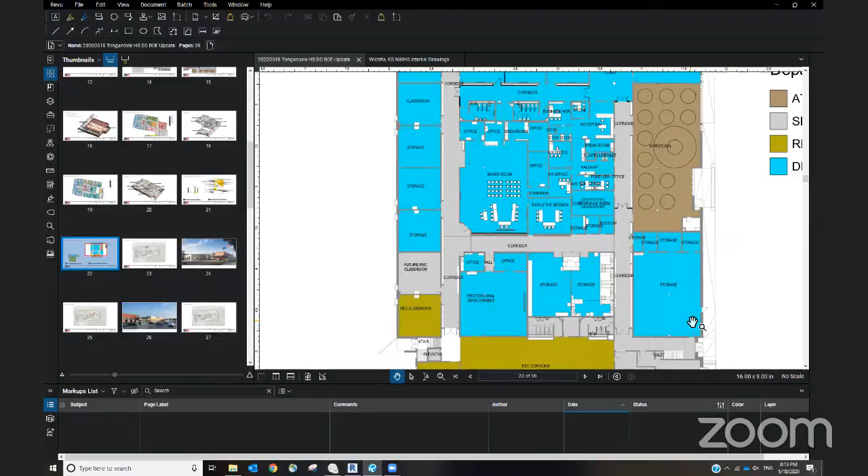Which could be modified down the road depending on how some of those other spaces are programmed in the future. It looks like there's some other doors down here going into that commons that could have some control on them, couldn't they? Yeah, I think you're right. I think the rec classroom is the only space that would be the exception to that - they could put an unlock and lock period, kind of a manual process to lock and unlock at the right times, but looks like we could adapt some processes to control access if we have problems, or before we have problems.

Yeah, I would almost say, could you put double doors across the hallway between the rec classroom and the future rec classroom, so that at that point in time the rec is completely isolated from district maintained property. That's probably something we could address as we move through this, couldn't we? I mean, add in. Yes, yep, okay.

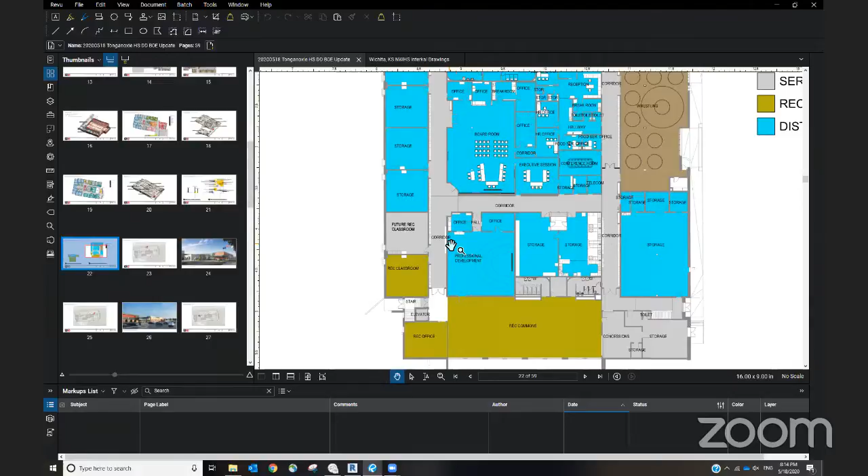Actually I only had one question there, so I'm down two questions. The other thing was the academic wing - actually the admin area was where I was looking. I see a lot of angular classrooms because we match the angle of the academic wing with the administrative, squared that up, but then that creates a lot of odd angles inside here. I'm just worried about usable space and how tight that is, or the corners, because odd shaped rooms are always a little bit difficult to work with. And what the reasoning was architecturally for that, in lieu of squaring it off and making up the angle at the vestibule and lobby versus at the corners of the existing building.

Well, that move on the angle was to create visual interest. The angle of the educational wing was actually to make it fit on the site, and then the admin is responding to that. The rooms - if you look closely, the offices, the workroom and conference room, even the nurses station and counselors - all of those are square. Where you get to the odd shaped rooms, one is a break room, one is in-school suspension, security storage, and then the reception, which needs that extra space to flow anyway. So I think we tried to minimize the impact on rooms that want to be rectilinear, and use the spaces that could be more adaptable to that.

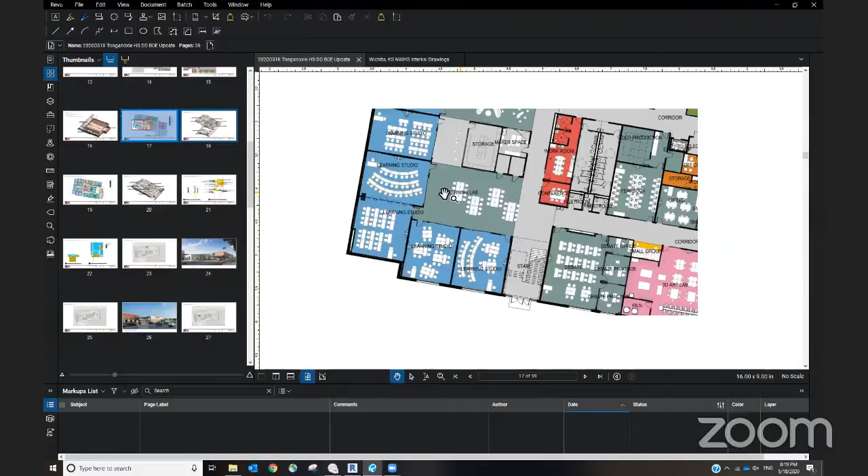I think it's going to make a difference with what we agreed to with the rec commission. I don't know if our team has looked at that or not. I don't want to speak out of turn here, but I believe the work that Lauren and the staff have done to evaluate the cost for the rec center has taken into account the functionality of the HVAC.

It is, and how that is separately zoned. There is no renovation of the HVAC equipment or controls that is part of the scope of work right now. Okay, thank you.

All right, Chris, anything? No, he's had computer issues going in and out. Yeah, I was just wondering, moving forward on this vote, I mean, we vote. I like the plan. There's been a lot of dedication, a lot of work.

But are we going to evaluate and look at some of these concerns? Or are we just rubber stamping this? We're good, we're moving forward.

Well, the most conversation, I guess, I think was about the gym. It sounded like there's a possibility of them incorporating that. I don't know if there's other specific concerns that want to get incorporated into a motion, or I don't know. I guess I could look to the team for a response first.

Yeah, I think similar to what we did at the schematic design, when we presented at schematic design, the biggest comments that came out of that was the parking lot and the traffic flow. So while the board approved the progress of the project and we keep moving forward, we are going to note the comments and the things that we need to look into and report back on.

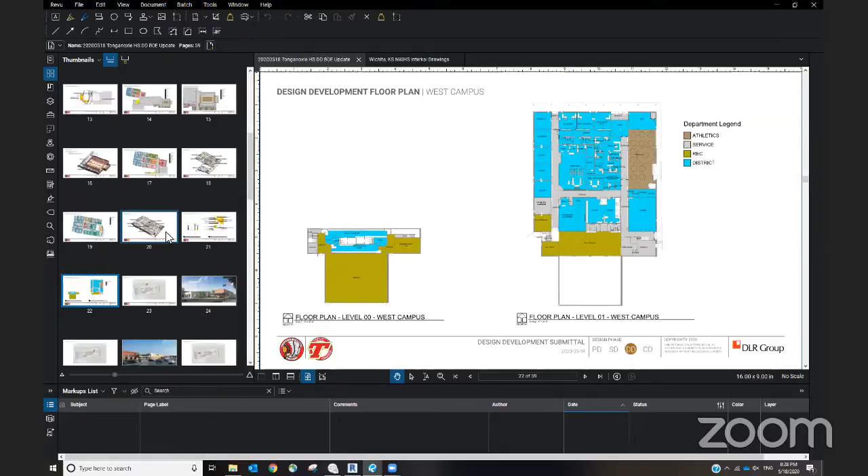Yeah, can I ask just to be clear, with all the different comments regarding the gym, can you maybe summarize and clarify what the board's concerns are with the gym? Are we talking about just this east end bleacher section, looking at if there's a way to get that closer to the floor, and how that maybe relates to the additional storage room? That's my interpretation, but I don't know what Drew's opinion on that would be.

Well, technically the board can only communicate through motions and votes. But as me as an individual, if I were to make a motion right now, it would be with the east end, the storage, and looking at the flow path from the existing gymnasium to the concession, utilizing that efficiently, which may mean relocation of that concession. But that would be a lower priority than the east wing. If the east wing was rounded out with doors there and that seating was a lot closer to that end of the field of the court, I would probably approve it with the concession as shown. That's a lower priority for me. The bigger priority is the storage and the east end with those bleachers.

And that's just me, others may be fine with it as is, or have additional things or different opinions. Maybe Mark or Lauren or Aaron could explain to us how that space, I mean it's 200 and some thousand dollars, 55 feet by 25 feet of space, that I think is for storage. So for me to vote for it, I'd like to understand how that's going to be utilized. Maybe there's more space or more programming.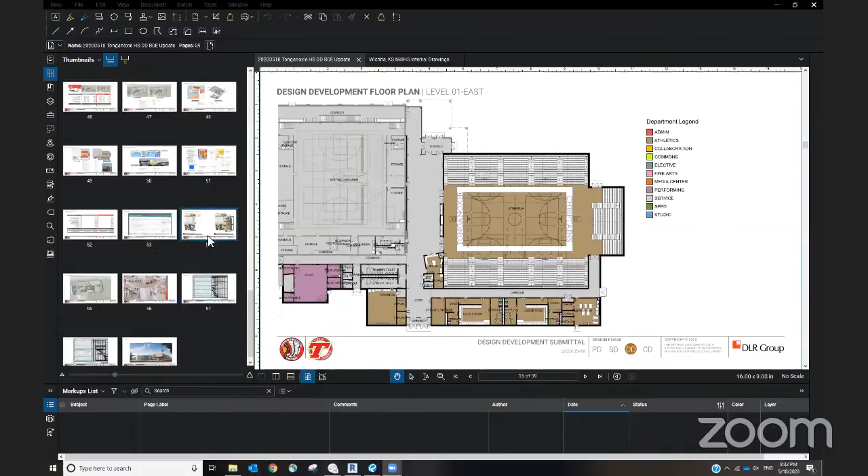First of all, I want to clarify that the multi-purpose room is not currently part of the DD budget presented tonight. It's still listed as a cost option, so it's not technically asking for approval at this point. But as you can see, it aligns with the east wall of the back of that east section of bleachers, so from the exterior there's one facade line there. So like Mark just said, if you scoot the bleachers in closer, that would shrink the width of that multi-purpose room along with it.

That multi-purpose room is really odd - my concern with the way it's shown right now is that if you start putting storage in there, you're going to have to move out a ton of stuff to get to the things in the back. I don't know.

Unless it's used, if it's the size appropriate for batting cage or pitching practice or golf practice or all of that, then the shape does make sense if that's really the use of it. That's why I was asking what the programming for it was, because it seems like a crazy big expensive storage space. But if it's for other purposes, it might make sense.

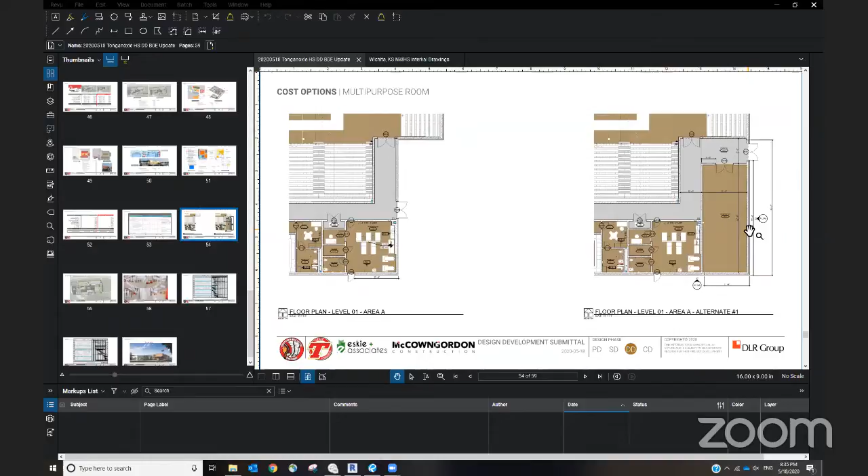The ask was for 1,000 square feet. To get it to square up on the edge of the building, I think it ended up being a little over 1,100 square feet, and then had to add the corridor extension there too. So overall, the increased building square footage was 1,400 square feet.

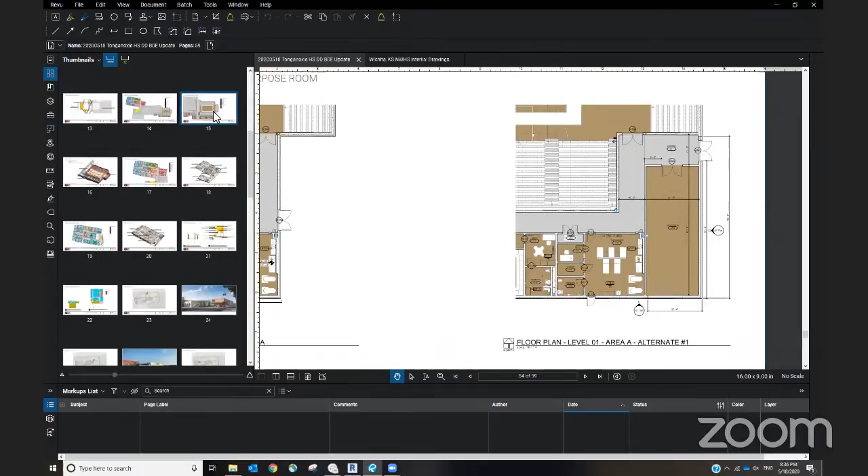I don't want to get sidetracked with the bonus room - we're still evaluating that. So if the thought or the motion is going to be on the gym to reevaluate that east bleacher section, it may take a little bit of time, but it's not like we'll walk away from tonight and won't come back until 50% CDs. It's something we as a team would have to jump on right away and see what the options are and what the impact to the design process would be.

So my understanding is, if we do not vote for everything right now tonight, then we're putting the whole entire project on hold, the whole schedule is delayed. And if that's the case, are you talking about it being delayed a day, or 2 weeks, or 2 years? What's the timeline that we're delaying it?

So Kaya, this is Robin with DLR Group. We would need to evaluate that with the design team, but it's not a day and it's not a year. It's probably a week to two weeks, because the people we were going to move on to construction documents now need to stop and reevaluate this area. So all in all, by the time we come up with a design, get it approved, and move on, it would take that long.

So how much are we tracking ahead from our current baseline right now? We are not ahead of schedule, we're on schedule. No, with regards to the overall project, not the design, the overall project. We are tracking with the overall project schedule right now, Drew.

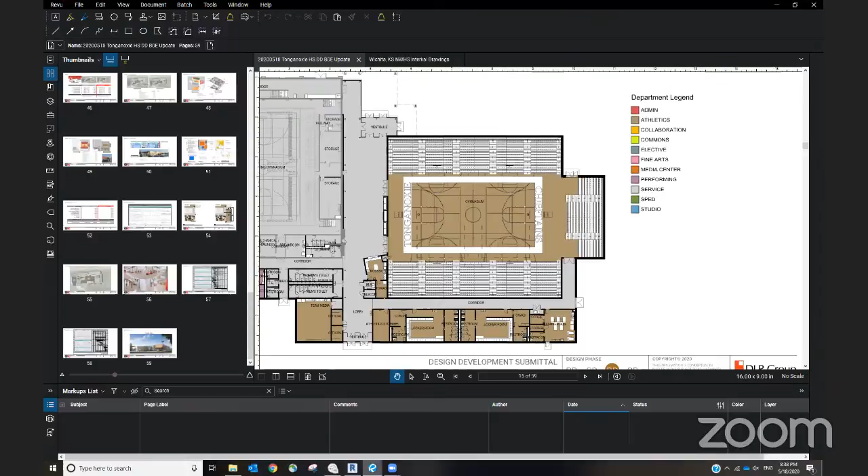Can I share my screen? I've done a little overlay on the gym, I just want to show everybody what's going on here. Craig, will you also mention the pass-through we have from the existing gym to the new gym? Oh yeah, and the bottom exit also leads right to the concessions area too, by the restrooms. That makes it pretty close to the existing gym. Yeah, there's a pass-through here. Is everybody seeing my screen?

Yes, gymnasium. Okay, so you can see where the court was underneath this gray box. So here was the east end line or baseline. There's 6 feet from the court to the painted baseline. This was where the portable, what do you call it, goal is. So that's the base for the portable goal. And as I threw a dimension on here, it's 4'6" from the wall to the back of that.

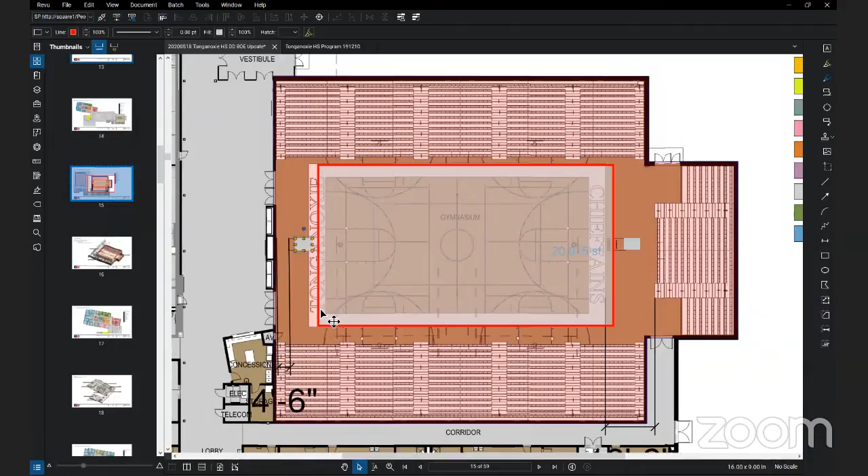Which I don't think is enough room. I think we want more room for circulation there. So then it was 6 foot wider over here, 24 feet versus 18 feet to the court here. So if we move this 3 to 4 feet, if we pick up 3 feet here, we're going to be at 7'6", which is enough to get people through there.

And then we make this 3 foot shorter, so we've picked up that difference and just split it between the two. So then our goal on the east end moves out and we've got our 7.5, 8 foot clear to walk by here. There's not a lot of generous room once we use those portable goals.

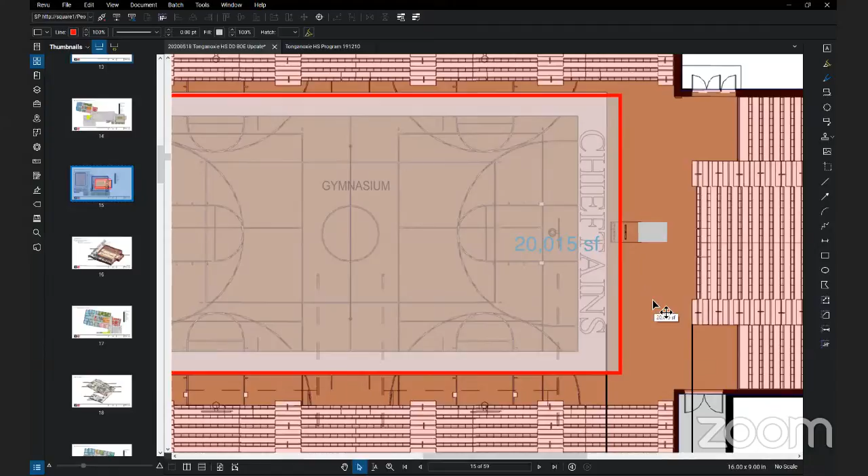So would it be possible to have drop down goals instead of portable goals? It is, but the request was made for portables. What was driving that request? I think just game experience for players coming into a unique gym, trying to create something that's a little more unique than our neighbors. That's kind of what drove it.

Yeah, my preference would be to have the facility be unique and not - I mean, the goals I think are a good idea, but I don't want to do it at the cost of the facility. Do you believe this facility is unique? I don't think it's as unique as our existing one. It's not, and that's kind of what was pushing us.

We wanted to, without going overboard and creating a Taj Mahal, create a facility that is unique. Just my own opinion, if you take out these unique things, it's very similar to other gyms. It's just another gym. And we're competing against a gym right now that this community thinks very highly of as being unique anyway.

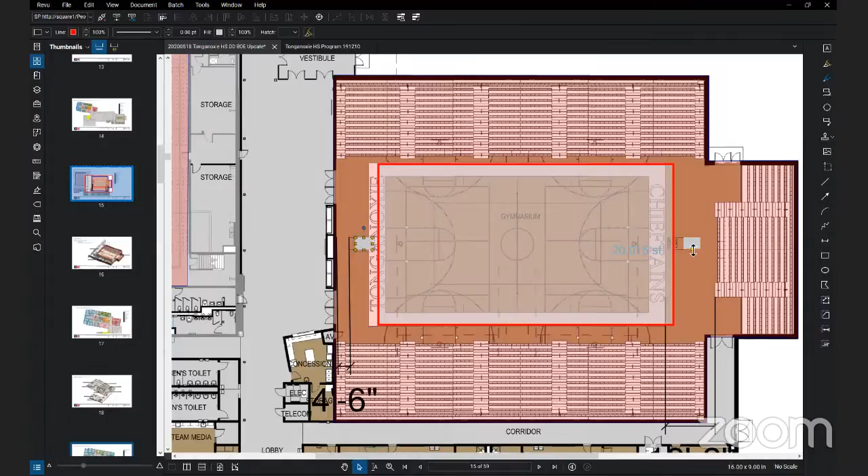Here's what I'm getting at: I don't think we're going to solve it tonight, but if the motion has this in it and it gets passed, I think the team has an understanding of what we're looking for as it relates to that.

No, I just want to point out the extra room, or trying to bring those closer, is at odds with the portable goals. So we've got more than one problem to solve. Right, but then it goes to, is having the fans closer in that experience with the court a higher priority than the goals? And I don't know that. There's going to have to be a group of people make that decision.

Hey, Drew, or Craig, I have a question. So right now, how it originally sat, I think you could put a basketball goal there and still shoot a 3-point shot, still have a 3-point line where you could get extra shots in that area. But if we move the bleachers up and make that space tighter, does that eliminate that? Yeah, I don't know, we have to look at that. You're talking about at the south end? Yeah, well, let's see.

Well, one thought I'm having while I'm sitting here is if we don't like that for our students, why don't we put the other students over there and make it a disadvantage to them? Right by our band. Exactly.

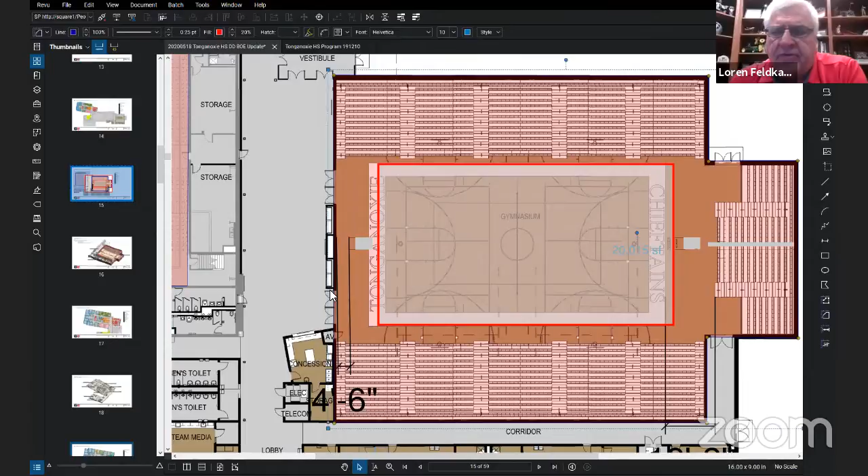Hey guys, this is Justin. So on the east end in question, the bleachers are shorter on the sides to accommodate the doors. Does it solve the problem if, rather than those shorter sections of bleachers on the east end, we do a shorter section of bleachers on the north and south, and put the doors going east and west instead of north and south? Does that give a perception that the east end is closer to the court if you don't have the section set back? I don't know if I'm making sense or not.

Yeah, I think I'm picking up what you're putting down. So the bleachers would be over here, and then you'd block out here and here, and put the doors right there going east rather than south and north, coming out. The doors would exit this direction and this direction. To me, part of what makes that east end feel so separated is the sides where they're backed because of the doors.

I think that's a great comment. It shifts a little bit of the seating, and we could look at how many seats that block out would lose. But I agree the setback sides, the wings on the end, can get longer because right now they're cut back. Overall, it should equal out.